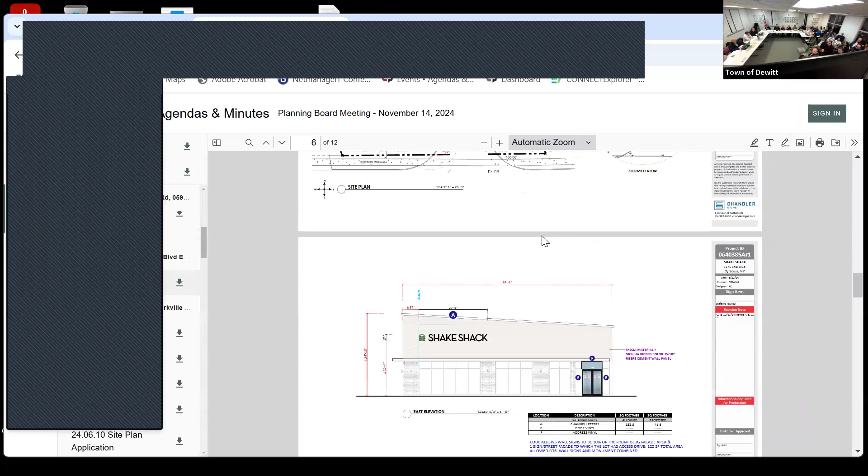The additional proposed signage does not increase pedestrian or vehicular safety, enhance the aesthetic value of the building, nor does it identify a patron entry. The sign facing Erie Boulevard already provides significant visibility of this use to the cars traveling publicly down Bridge Street to Erie Boulevard. The additional signage requested does not meet the purposes of signage as set forth in code section 192-106A, 1 and 2 of the town code. Accordingly, this board recommends that the ZBA deny the variance request for the additional building sign facing the project.

Excuse me, Nate, yes, I think that it's the sign facing Bridge Street that is providing the visibility to people traveling down Bridge Street to Erie. So I believe that would be a correction to that resolution. Accepted. Does that make sense to everyone? Yeah.

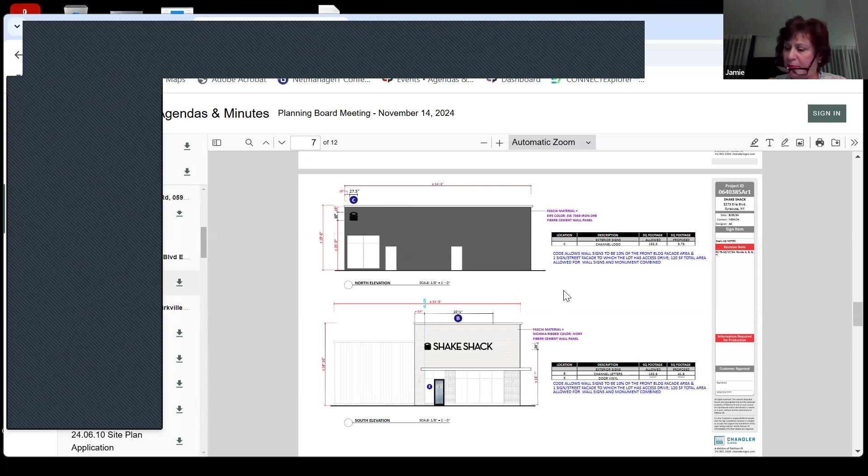So we have the one facing Bridge and the one each. Yeah, the one that we're talking about. The one pertaining. Yes. The hamburger, which I call it north, but it's not. Which is in the upper left of the building elevation. Relative to the building elevation, it would be north. That one right there. Yeah, it's that little hamburger logo in the upper corner. Yep.

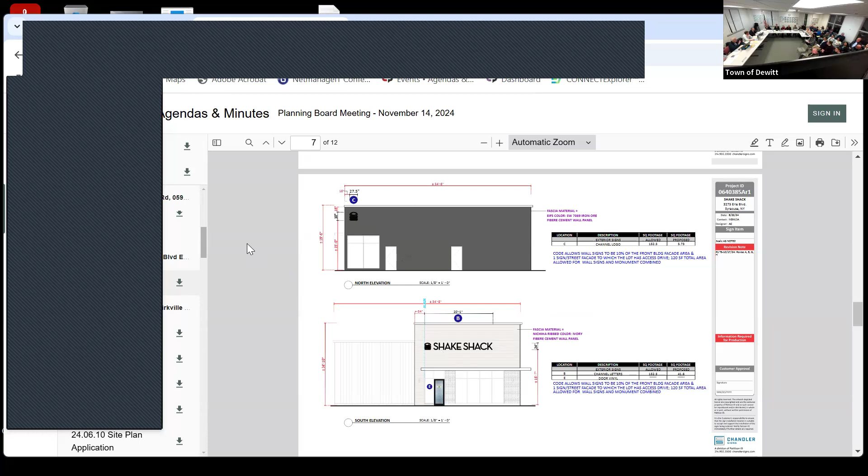Do I have a motion? Dave, second, Kevin, all in favor? Great. Unanimous, thank you. Next up, Restoration Pro. We have applicants here for Restoration Pro.

This one, Kirkville Road, right? Yes, I'm representing the owner. Okay. Why don't you just state your name for the record? Želimir Miranović. I signed the paper, my name. I should sign his name too. That's fine for right now, if you're here on behalf of the applicant.

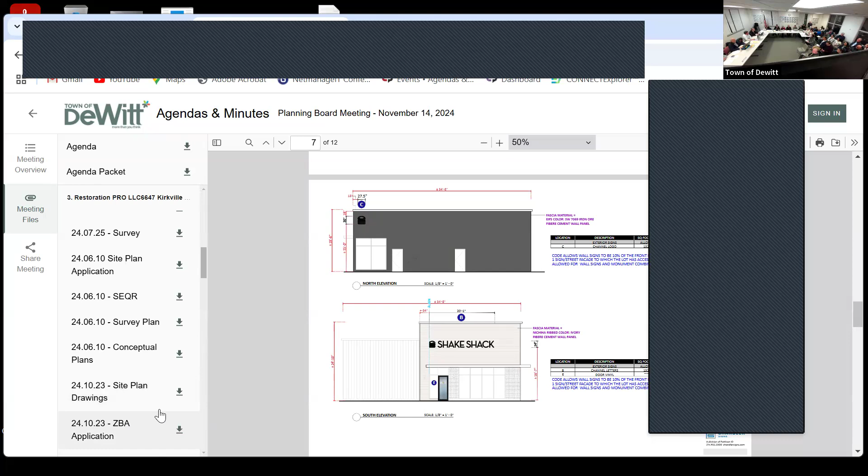Yes. Okay. So what we have in front of us here for Restoration Pro, this is a modification to the site plan. They're looking to build an addition on the back of the building. We've worked with this applicant over a couple of sessions to reduce the number of variance requests that they're looking for from the ZBA. I think we've gotten it to a point where we only have the 1 variance request, which we'll make a motion on this evening. Everyone's familiar with this site?

Okay. I'm going to make a motion for recommendation to the zoning board of appeals to allow for a rear yard setback of 29 feet for the construction of a small addition to the existing garage on the site. The required setback per code is 40 feet, which requires an 11-foot variance. The applicant has worked with the planning board to minimize variances that might be required for this site and to present a reasonable plan for this use in a high-tech zoning district. The building addition will be in conformity with the other site plan regulations and requirements and will not detract from the aesthetics of the site.

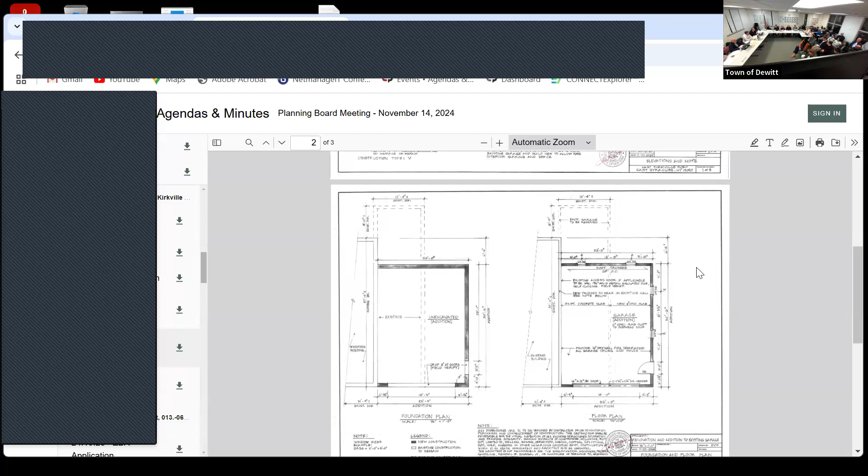The applicant shall be required to return to the planning board for final site plan approval, should this variance be granted. I think the variance is 10.6 feet. 10.6. Do you have the site plan? The current site plan, proposed site plan? This is the available one. Yes. The final was 29.4. Yeah, so 10.6 is the variance. So we'll modify that to be 10.6.

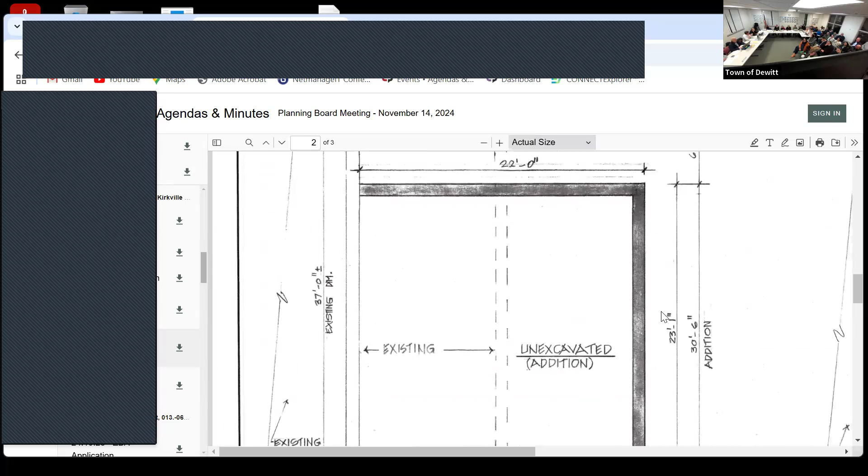Circulation on the site was also, yeah, so there's the space for them two-way. It is tight on the parking spots there, but that's an existing condition. They're allowed, they can get it. Yeah. What is the actual variance then that's requested? 10.6 feet. 10.6, okay, rather than the 11. Thank you.

Any other questions? No. A motion to approve? Leif? Kathy, all in favor? Nate, did you want to talk about building materials and all of that in this, or save that until we come back? We'll save that for when they come back.

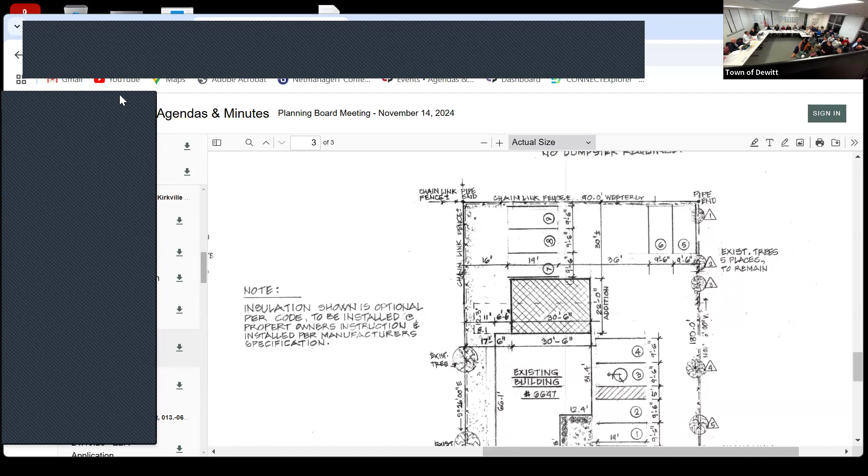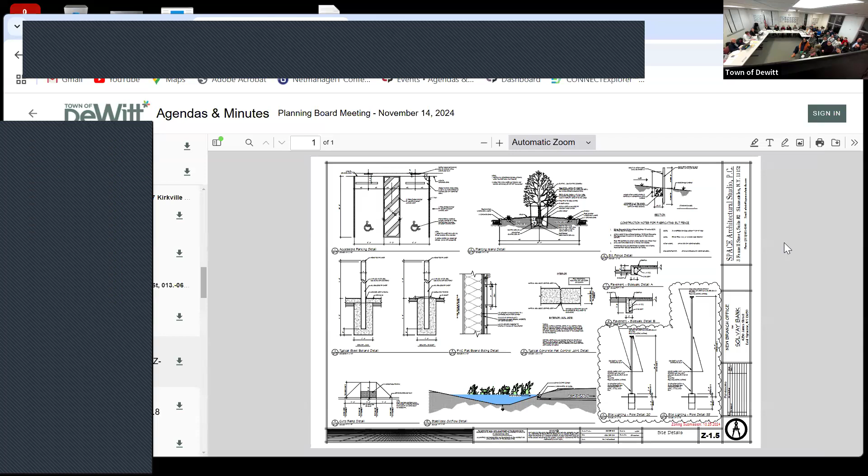All right, last up, we have, well, not last up, last of the recommendations, is for Solvay Bank. Yeah. Yes. Bill Murphy from Space Architectural Studio representing Solvay Bank. So here we're looking for a signage recommendation to ZBA. This is another one that we worked with the applicant in terms of the signage. I'm going to offer a motion for recommendation to the zoning board of appeals as follows.

This project presents a site plan improvement, which is a freestanding bank on a site where a grocery store also exists, making this a plaza multi-tenant site. The project presents two signs which are permitted of right in the code. One sign on the building facade that faces toward James Street and one building mounted sign that faces toward West Manlius Street. The applicant seeks a third building mounted sign which will face the parking lot in the front, air quotes, which is also the facade of the primary pedestrian customer entrance, the southwest side of the building.

The applicant has worked with this board to minimize the requested signage, including foregoing potential monument signage and additional requested signage on an additional facade facing parking. This signage is reasonable for the site and enhances reasonable traffic patterns around the site and allows for simple identity of the use. Accordingly, this board recommends that the ZBA grant the variance for the additional sign as presented with the understanding that the applicant must return to the planning board for compliance with a multi-tenant sign package as required by code.

Got it. Understand multi-tenant sign package. So we have to come back with a full multi-tenant sign package for the entire plaza, but that would be after we make it through the ZBA. Correct. Yep. Okay. Right, and there'll be a final approval, this is just the recommendation, then we'll look at all the rest of the details as well.

Yep, understood. The applicant further requests that the stacking requirement for the ATM lane only be reduced from 5 spaces to 4 spaces. This applicant has worked with the board on this very tight site to present a project that will minimize the need for variances and fit within other code requirements relative to drive-throughs, including the prohibition of same in the front yard. Accordingly, the slight reduction in stacking will make this site work appropriately for the ATM use.

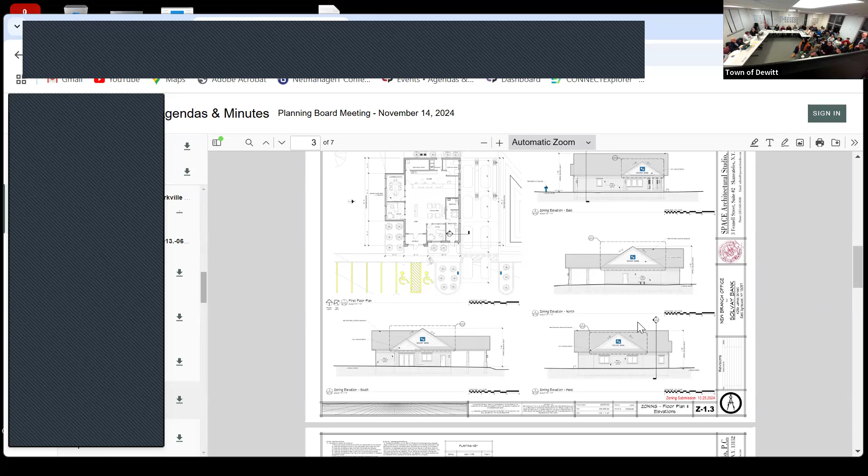The applicant has further shown that the stacking as presented with only 4 spaces will work for its use without major traffic inconvenience. This board therefore recommends that the ZBA grant the requested variance to allow for 4-car stacking in the ATM lane instead of 5, with the understanding that the applicant will return to the planning board for final site plan approval.

All right, so we have those 2 variances. Are there any questions? Has there been a finding on the official front yard? With respect to 2 front yards, is that still an issue on this? I don't believe so. No, no longer an issue. Right. That's a good solution. Yep.

Discussion. Motion to approve the recommendation. Kevin, Danny, all in favor? Great. Thank you very much.

Thank you. All right, so we are gonna shift now to the public hearing. The way that we're gonna do this now, everybody that came in will have hopefully signed in. If you'd like to speak, you need to sign in on that. We need name, address, phone number. We're gonna offer 3 minutes for those people that would like to speak. It is a strict 3 minutes, and if you look around, there are a lot of people here.

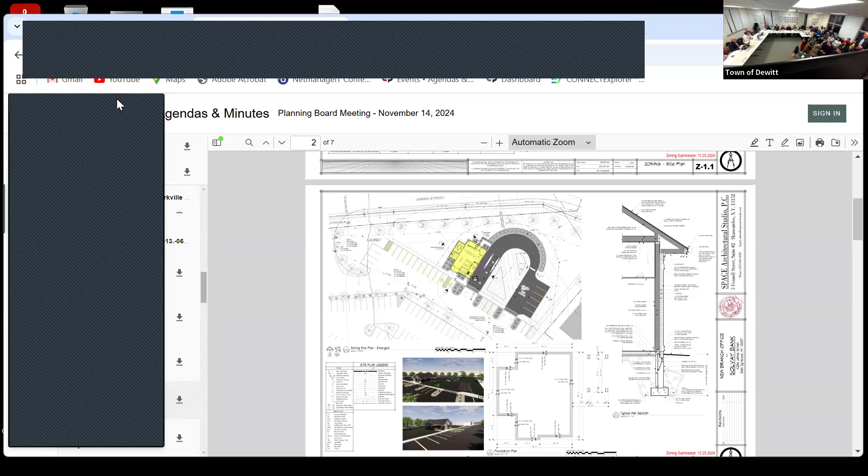After which we will ask the applicant to present their current layouts. And then this board will have a further discussion. I will say, once the public hearing is closed, public comment is done. I mean, we're not gonna open this up to people talking over the applicants, and we're gonna let them have their time to speak. And then this board will talk afterwards. So with that, we will.

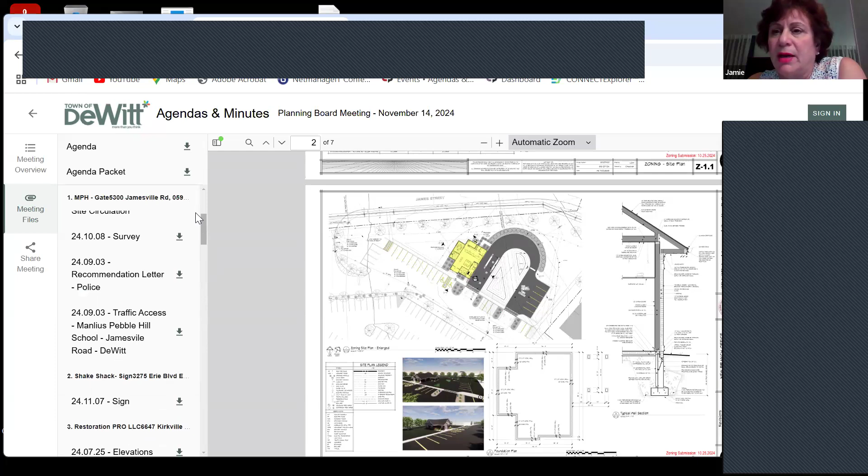Excuse me, Nate, I do want to state that I'm recusing myself from this matter, that Matt Natoli, the town attorney, will act as attorney for this matter. And I will be muting myself and turning off my camera. Thank you.

May it please the board, my name is Karen Doctor. I live at 109 Stonecrest Drive, DeWitt. My family and I have lived here for 31 and a half years. I am here solely in my capacity as a resident of the neighborhood. The issue before this board is whether MPH should be permitted to modify the existing site plan from 2007 to allow for vehicular site circulation through the gate at Pool Road during school student dismissal times.

On September 27th, 2007, this board granted the application of MPH for controlled site approval of the MPH Andrews practice fields with certain conditions. Significantly, in order for this project to have been compatible with and sensitive to its residential neighbors, MPH was to ensure that the gate at the existing lower level field on Pool Road be closed and a man gate installed for the students' walking access to Andrews Road.

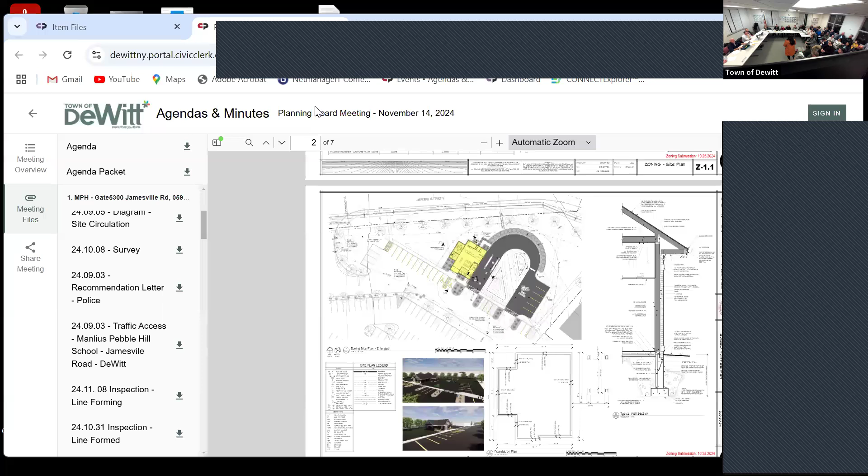throughout the MPH community. And I would just disagree with some of the opinions and the blanket statements that MPH parents are somehow distracted, driving too fast. Because that does not apply to every MPH parent who uses that alternative pickup route. And it's frustrating to hear that all of us are clumped somehow into this pool of people who are somehow misusing our speed down through the neighborhood, and that we lack the respect for the residents who are there, which is not true. Thank you.

Michael Green? Hi, Mike Green at 6891 Whitfield. I am a father of 3 lower school students at MPH, resident here and also a combat veteran. I think all of those things are important to say, but it's really down to our opinions. I don't know if there's a way of advocating for more of a metric-based decision and assessment that actually can ID some of these issues that are being talked about and described dramatically or not. Previous places I've lived have been able to do that, so I don't know if that's an option or not. But I would advocate for something that's a little more metric-based so we can understand the facts of what's going on as opposed to hearing more things.

Renee Vinyl? Just following what Mike Green had said, I'm a parent at MPH who's done both ways of traffic. And I feel like it's a little bit mischaracterized from what I've seen going through the neighborhood. I actually remark when I drive through how quiet and calm it seems. I never see any neighbors. I hardly ever see other cars even going up through MPH, maybe one other car at a time, and it seems relatively fast and seamless compared to the way that it was. So if someone could maybe observe both of the ways, and it's not so opinion based, I would agree with that too.

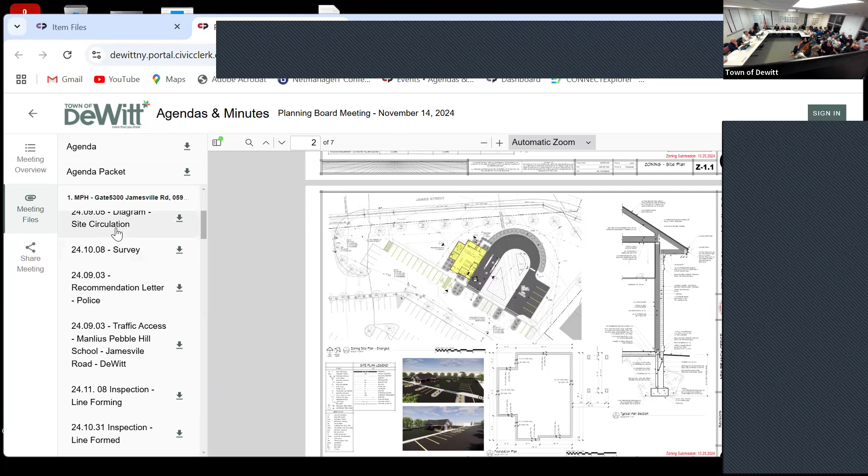Great, thank you. At this time, I'd like to offer MPH the opportunity to present. They have got new options to show us here, for the public. Yes, indeed. So thank you very much. I appreciate it. Are we under the time constraint or not? No, we're gonna have about 15 minutes to look at your updated application. You've got it from here.

Thank you, appreciate it. First I want to say thank you so much for everybody who's come tonight, including our neighbors in the neighborhood. I'm really, really grateful for a chance to meet you for the first time because I moved, right? This is my second year here at MPH. I moved to Syracuse a little over a year ago.

We really care about being a good neighbor for the neighborhood. And so I have to confess, I'm a little sad that this is the first time I'm having a chance to meet you. I would have loved to think that if there had been any kind of an issue or complaint that you would have felt comfortable taking it to us directly. And I just want to say here in public, on the record, to all of you, regardless of how this hearing turns out, either way, I would like to have some kind of an established mechanism for us to stay in contact with each other because it matters to us.

I don't have anybody's email addresses. I contemplated going door to door knocking at some point, but that didn't feel right, especially with an election season on and all that kind of stuff. So I just want to say that that is a genuine desire on my part as the head of school. So let me just give context here about what it is that we're thinking about.

The presenting problem emerged last year when I took this role as the new head of school at MPH, having no context of all of the history that came before it. My chief financial officer, Dr. Matt Carr, also started new with me. Neither one of us had any of that kind of history or context. There had been quite a bit of turnover in the administrative leadership at the school over the last decade. One of the first things that we learned was that we had a problem with the pickup procedures at the end of the day because there were two significant issues.

We did, at the board's request, put together additional diagrams that show other possible options, including the elimination of one of our athletic fields, which not only supports athletics, but also our club and organizational activities, commencement activities. They are listed in the top right-hand side. Our lower school classes for recess included, and community events as well. So this would seriously impact the school's ability to support its students in the pre-K through 12 environment and its community, while coming at a significant cost as well, both with drainage, paving, et cetera.

The other option that was asked for us to consider would be to widen the road closest to the access road that goes next to the gym and closest to our playground for young children. By doing so, we have the same concerns with cost and moving lighting, drainage. In addition, that road would abut directly against the playground where our students ages 5 through 12 play both during and after school, creating a significant safety hazard with two-way traffic at that point.

In addition, we have the issue with the buses coming in, and because the number of buses exceed the length that we have for pickup, because of the number of school districts we support, at a certain point, we would no longer be able to process through in two-way directional traffic and back up significantly onto Jamesville Road in both cases.

So in both cases, we do not feel as though that is a suitable alternative to what we have proposed. And I would add, we're talking costs in the range of six figures and up, right? We don't have those resources to spend. And I don't have the luxury of seriously compromising our program by removing fields, by removing playgrounds for children, right? So, to my understanding, we did look at those, but they're simply non-starters for us.

So to my mind, the only viable alternative, if we're not allowed to go ahead with the site plan, is that we're going to have to go back to rules of the road on Jamesville Road. And again, we're not allowed to be crossing guards. My understanding is that the town of DeWitt can and should pay for crossing guards to do that. That's, I guess, on the town, but that's not something that I have a choice to be able to do. Is that true?

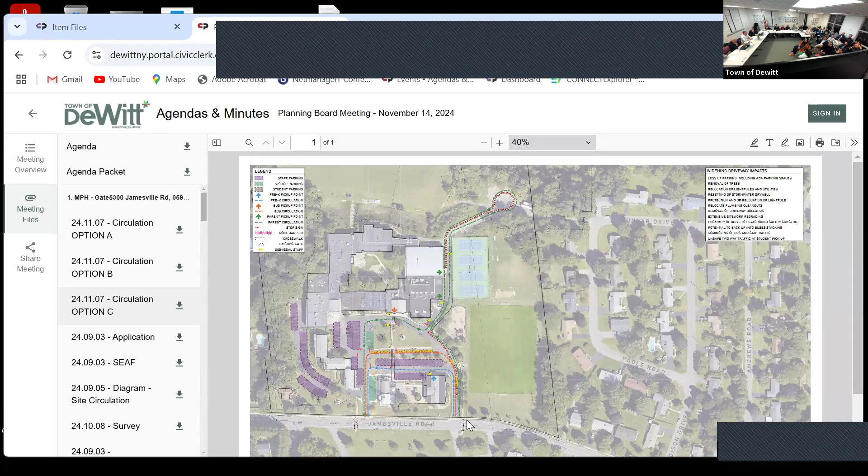It's not true. It's not true? Holy Cross, another private school, we have a constable, and that constable operates in that school as school resource officer. Okay. We have to do that with a private school because we can't pay for things for private. I guess I'm not familiar with the office of a constable, again, I'm new here, moving from out of state, so I apologize. Is there training that they go through, or how does that work?

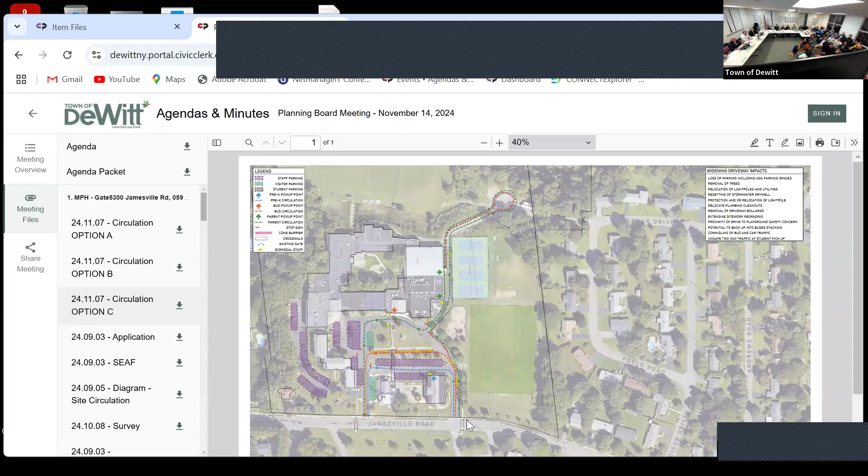They're a peace officer, but it's a way that the town can have police monitoring private schools. We're able to do that because the private school pays us upfront, and then we pay with the school's resources to the constable, so the town is not fronting any money or credit or anything. And I don't know if you've had conversations with the police department asking about crossing guards. I don't think anyone did, yeah. No one's saying that you have to have your employees out there shepherding people across the street. I think the town would welcome a discussion to get some more help with the actual police crossing the road.

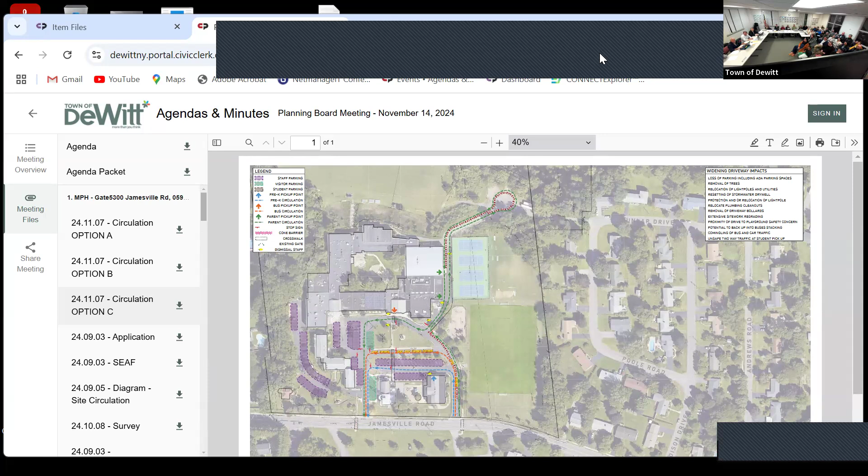Could we look at the videos so we can take a look at what's actually going on site versus opinions and a traffic study to document? I think for the visual people in the world like me, it might be helpful. If you wouldn't mind clicking on that link, that'd be great. So we flew a drone up on the site just to get our eyes on what was going on. The drone battery only lasts 10-15 minutes, high quality. So we're giving you a snippet from 3 to 3:10. And this is at 16 times the speed, so don't be alarmed at how quickly the people are walking and the cars are driving.

Could you expand that? We're not getting the times on there. Yeah, make it full screen, please. I got times in the bottom that are kind of ticking by. Mine's starting over for me, I'm sorry. We got times, so I want to go off the times there so we understand what's going on here. All right, if you do the hover, that should go away. There we go. Great, Monday, 11/4, 3 o'clock, don't move the mouse. It's not me, I'm not touching it.

You'll note our cars are stacked, they're not backing up, they're coming through the gate. Provided the gate is open at the time, you'll see that other cars are not only in the site, but they're stacked on the asphalt, which represents a significant distance from the gate. So backing up onto the neighborhood road would not be an issue based on this volume, for one thing. Next, there was some conversation about the cars coming in and then going back through. That's never the case. The cars are always going one way through the neighborhood, going through here and pulling out.

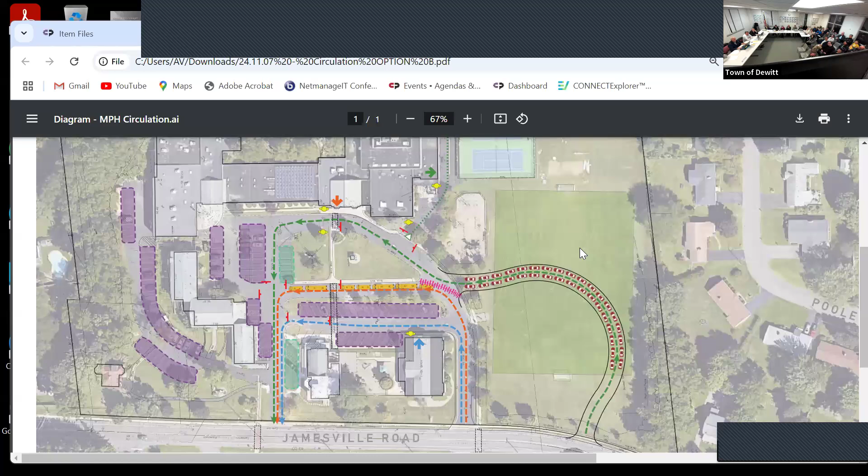I think what we need to look at here is certainly the application in front of us, but the fact that you have a significant amount of land, you have options to contain your traffic on site. Option C, even though you might lose a little by widening that area to create the loop, there are options. What's option C? Widening the one way out. We ran a cost estimate for that, right? Yeah, $100,000. I understand there's a cost implication, but forcing the cost implication from your property out into the neighborhood is not a reason for this approval.

I would say two things, though. One, bringing more cars on here is also when students would be on campus moving from field to field, and we talked about lower school students having to walk across those things. And two, there's a difference between cost in dollars, which I don't have, and cost in time, which is what people would be spending on Jamesville Road as the alternative. The option we're looking at here appears to contain all of the cars. Right, at a cost of dollars. Understood, which I don't have. Okay, I hear that.

I'm not challenging any of that, but the fact that you've got an issue that you can deal with on site somehow and be creative, and I know Christian can be very creative with figuring this out. Only with dollars though, right? Potentially. So I don't know. I could just use it.

Use the existing site plan and the existing rules of the road. And that's what we would have to do, right? Yeah, you can do that. That's what you should have been doing. And again, at the cost of safety to the neighborhood. That's your opinion. I think that we start to put something like money versus safety.

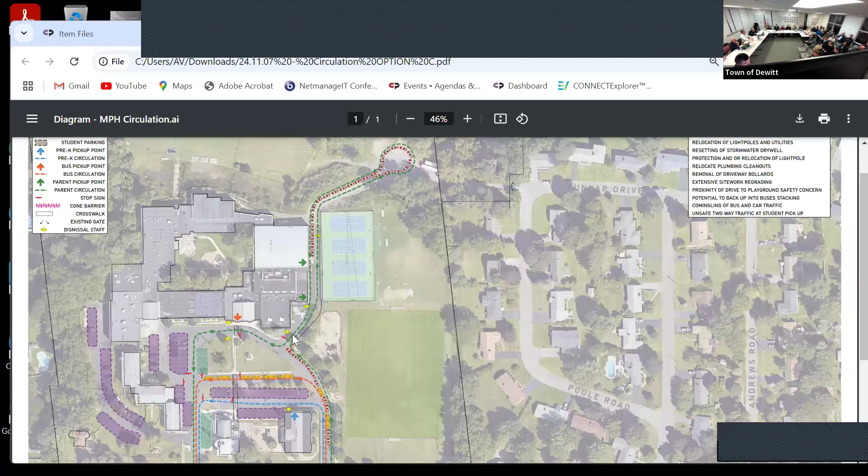Okay, next up, we have hallway comments. Give me a second, I'll let everybody head out. Thank you, appreciate it.

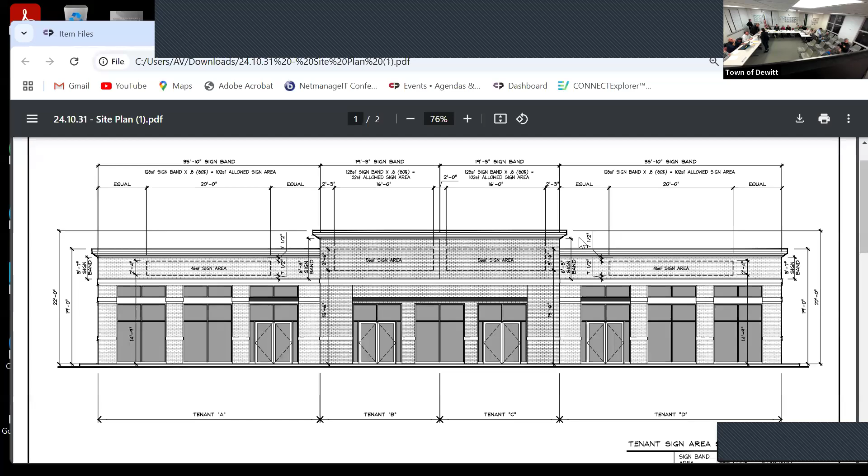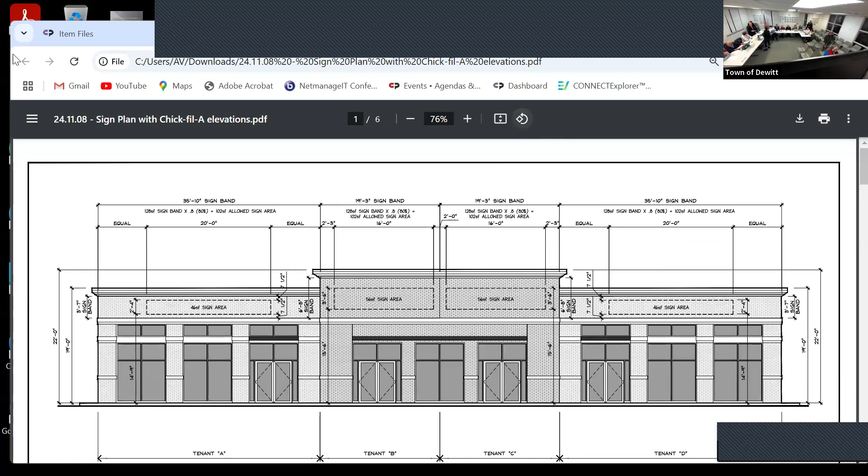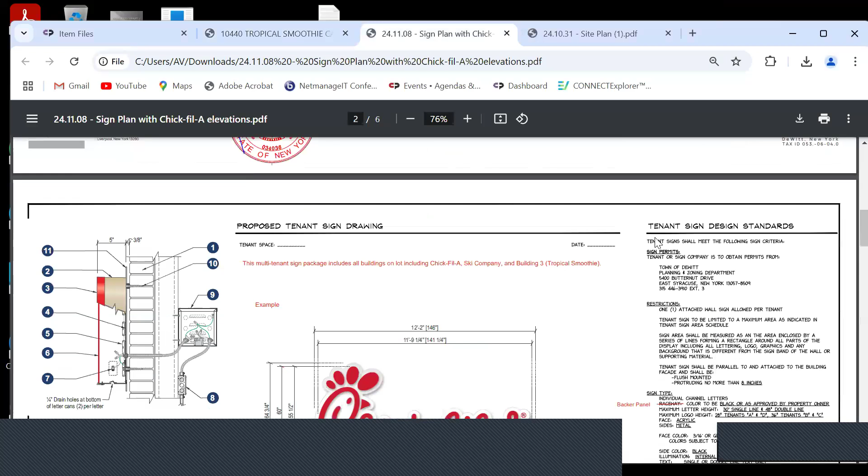Well, multi-tenant. I believe Chick-fil-A was already approved, and you guys wanted this building to have the same pattern. So basically we took the Chick-fil-A template and did exactly what they did to make it uniform across the whole lot, because that's how the code's written. We'd submitted one for Tropical Smoothie, but we got feedback saying that it needs a backer panel like the one Chick-fil-A already submitted. Yeah, I think that's the consistency that we want to see through the plaza.

Correct. So the other thing with this one, and maybe it's been corrected, the 2'4" sign area which was approved with this building, the Tropical Smoothie Cafe is bigger. It has to stay within that 2'4" height. Okay, so when you do your scaling and size, it's gotta stay within that 2'4" height. I don't think you're gonna reach the 20 feet, but part of the height is outside of it right now. You realize that, right? Yeah, this one was by the corporate Tropical Smoothie sign guy, and I don't think he's on this call right now.

But I mean, that's feedback we're gonna have to give them. Is the 2'4", is that line an actual building line? No, it's just a reference line. It's a reference line. Good, 'cause I don't. No, it's not. Yes, no, there are no actual lines.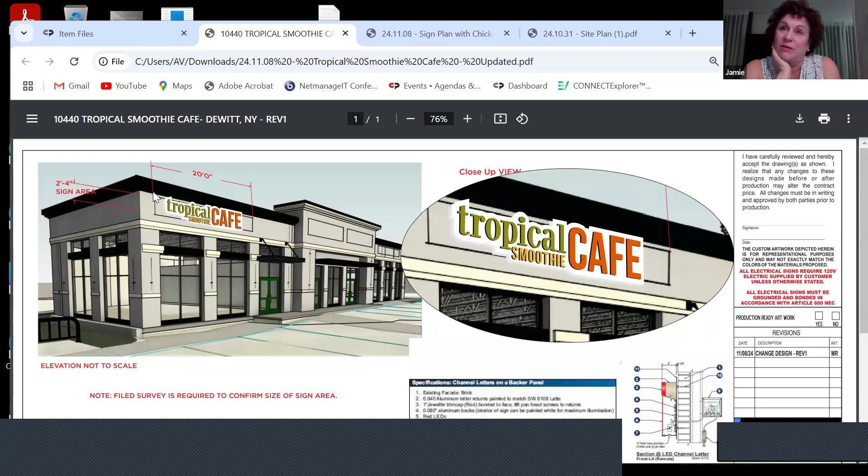Sorry, we need to fix that wording at some point. It's there, but this is what we have to work with. Because you could put nothing on your building in a clear glass window wall, you can see right through the middle. So why would you approve a window? I believe that was actually brought up when that was approved, like, what are you gonna do with this window? And if I remember correctly, I think there's actually a wall directly behind the window covering.

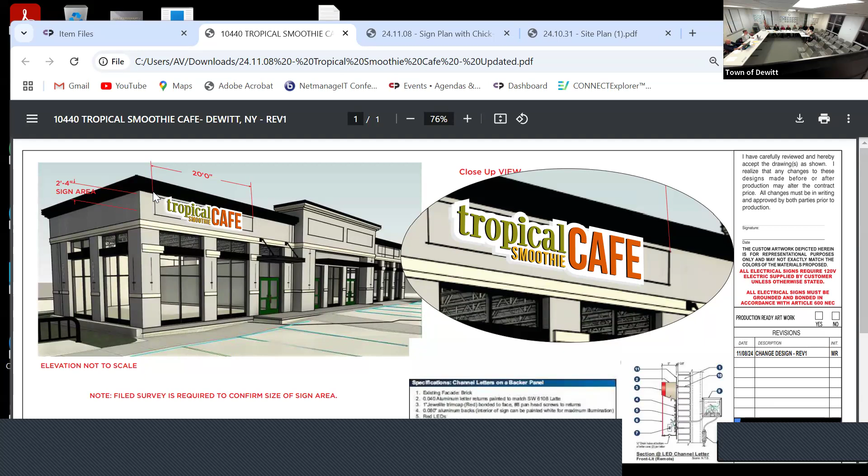Yes. So, anyway, okay, but I think we're here right now. That's okay. We're headed in the right direction here. Get this taken care of, then we can get everything put into a package and get a multi-tenant sign package pulled together. We'll have our standards set up, and then that's what we'll adhere to going forward.

Sorry, quick question: is the goal 40 foot per store, or does it really need to be 2 by 20? Say that again. Signage. I assume it's 40. Well, there's essentially 4 tenant spots there, theoretically; they have 4 doors. Yes. So if you look at the multi-tenant, is the 2 by 20 the criteria, or are we going to limit it?

It's 2 by 20, because when we approved the building, we approved the signage area, and that's 2 by 20. That's on there, and those are the identified squares. And in the center, it's less because there's no additional space for it. They just divided it by 2, 3'6" by 16, to get the square footage. So they can make a sign box that's that exact size, or they can put their logos in it, the logo signage, whatever they wanna do.

The color criteria has already been set by Chick-fil-A, but they're matching, so standard in there. Right, we don't think they have to meet the Chick-fil-A colors. No, colors just have to be approved by the owner. We're not doing any neon flashing lights. I'm putting that out. Okay, you got it?

Alright, for Tropical Smoothie, they're trying to open up the first week in December, when our build-out's gonna be done. What do they need to do with their sign now? Well, you've got to get a whole multi-tenant sign package into the town office, which includes all the signage, and then on top of that, we've got to get the other one addressed, the ski company.

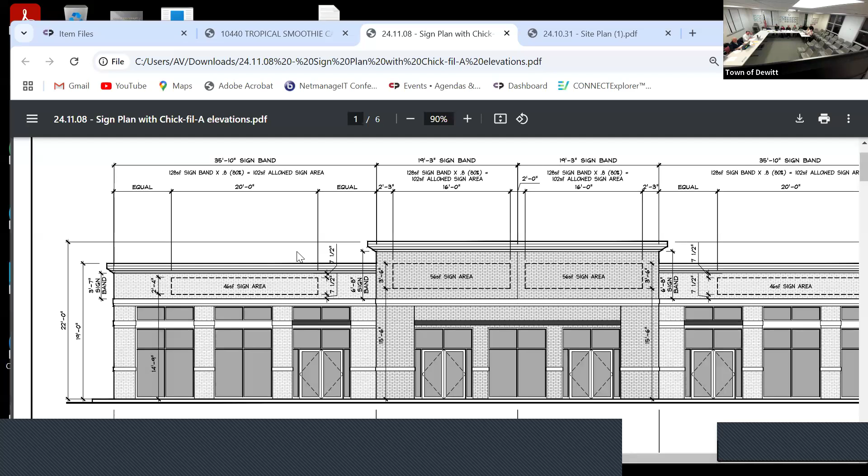So we're gonna have to resubmit this multi-tenant sign package again, even though obviously the window is holding it up. Well, the package that you have in right now shows the sign too big anyway. Correct, I can have them correct that. Right, so you correct that, with the Chick-fil-A signage. Does that come in front of the board or can it be permitted? That has to be the board.

The board, but if you can get the materials in, we have 2 meetings in December. This is our only meeting in November because of the holiday. So if you get the materials in, I don't foresee us having an issue with this at all. Just make it happen, we'll push it through, but you've also gotta get the ski company taken care of. I'll figure it out.

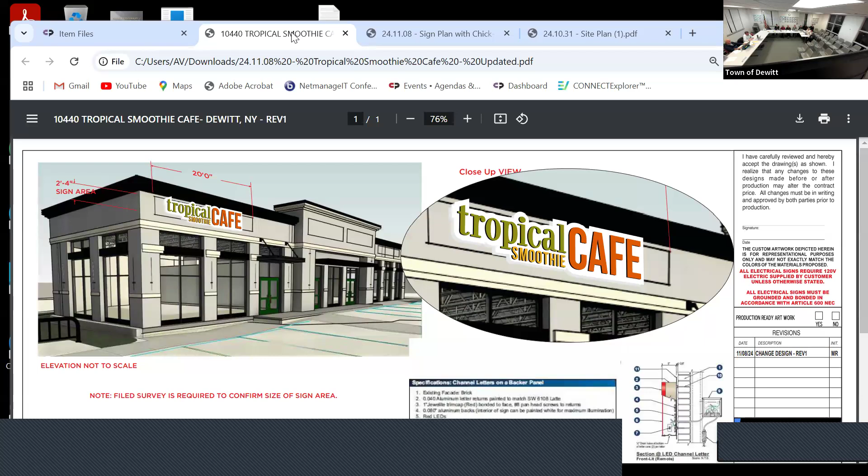Okay, right? And then I'd like to get a letter from you guys saying we're gonna take action, because it gives me a little assurance. Yeah, and that's fair. And so Alana's office can get you that, okay? Thank you.

What other entertainment you got today? I'll talk about some EV chargers. Why don't you give $1 million to the school? Okay. All set on that one, let's move on to the last couple of items. Yeah, keep picking up some work.

Do we have the applicant for the EV chargers? There's nobody else here in the room. Hi, yes, I'm here, I'm online. And you're representing all 3 of them, correct? Correct. Courtyard, Residence and Embassy. So let's talk about those as a singular. They're all different layouts. So, do you want to present? If I can, that'd be great. Make sure multiple people can share; I just sent a request for that.

And Bridget, what's your last name? O'Connor. Thank you. Just let me know if you can see my screen. We got it. Okay, good. I'm just gonna go through each one to explain the scope of work, since they are different for each one. The first project is at the Courtyard by Marriott, located at 6415. I'll show you a few different versions of the project because sometimes it's hard to just look at construction drawings.

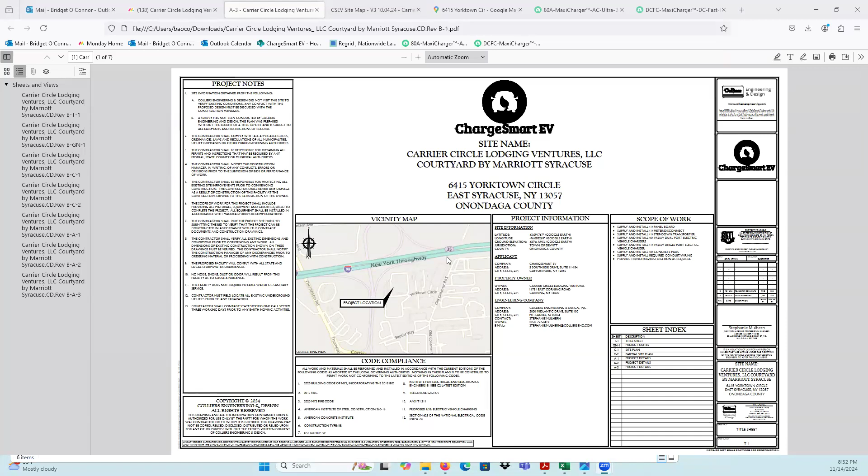Actually, we're lucky for these 3 projects on Google Earth, we can get right on the ground and look at them in real scope. So here's an aerial shot of this project. This specific project is a level 2 only project. So those are just level 2 charging stations, which are smaller, slower stations, I should say.

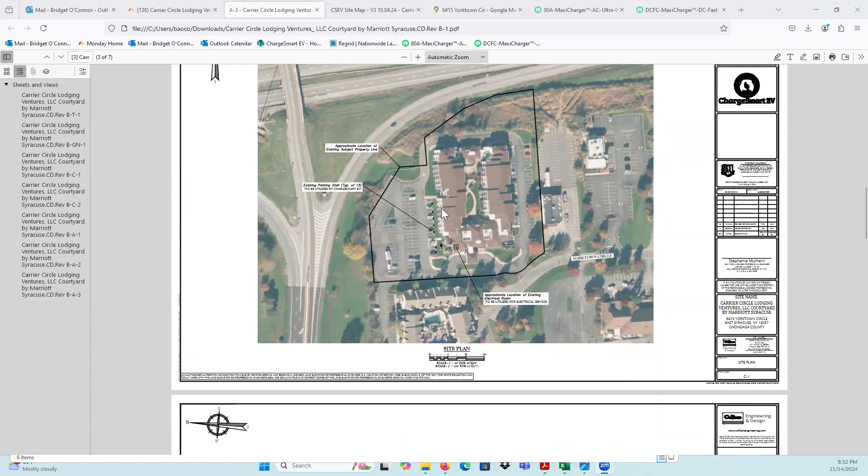A level 2 station, if you're not familiar with EV charging stations, takes between 4 and 6 hours for a charge, which is why these are great options for hotels because a person staying overnight at the hotel, if they were driving the EV, could plug their car in overnight and leave it there. So what we're proposing at this specific location is 6 level 2s that have dual ports on them.

So that would be 2, I'll show you a picture of the station in a second, but it's 2 ports per station and then also an additional single port, which is located in this location here. So we have 1, 2, 3, 4, 5, 6 dual ports, and then the single port in front of the ADA spot here. The power for these particular stations would be coming off of the main distribution panel, which is located inside the building.

I'm just going to move to another view of this so it's a little bit easier to see. So again, we have 6 stations along the side of the building here, each providing charging to 2 cars. A single port here, we would have a panel and our meter socket would be going outside of the utility room, which is located in this area of the building. Again, I'm going to show you, just drive around here.

So here's that aerial shot. If I come and stand here, we can see the area that I'm talking about. So the utility room is in here. There is space available on the main distribution panel that we could pull power off of. We'd be putting our panel out here and then the stations along this side of the building. Unfortunately, I can't get any closer. I can zoom in, but this is as far as I can go. The camera didn't drive.

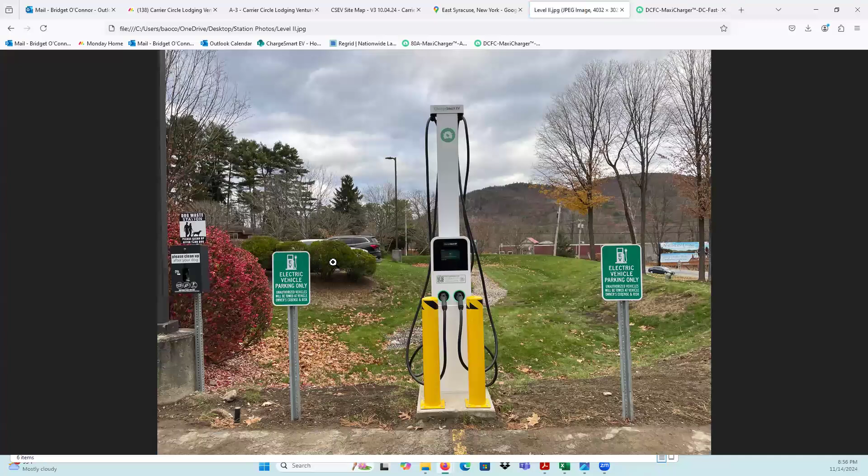Okay. One second, I hope you can see this. I just wanted to show a couple pictures if I could, so you could just get an idea what they look like installed. Much different. The yellow bollards. On a pad with the bollards. We have a few different designs that we do. If it's a sidewalk, let me show you a sidewalk here. This is when the stations are on the sidewalk, if there's enough clearance behind it.

Can you go back to the product cut for a second? Sorry, can you say that again? I cut out. Yeah, can you go back to the product cut sheet? Sure.

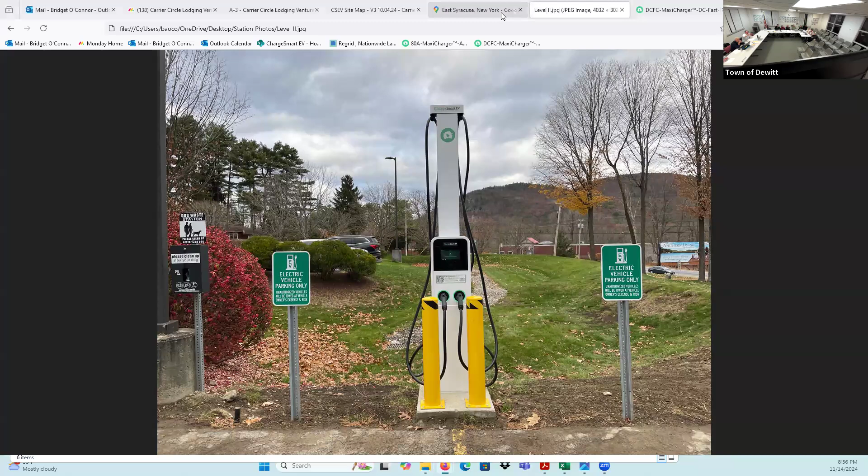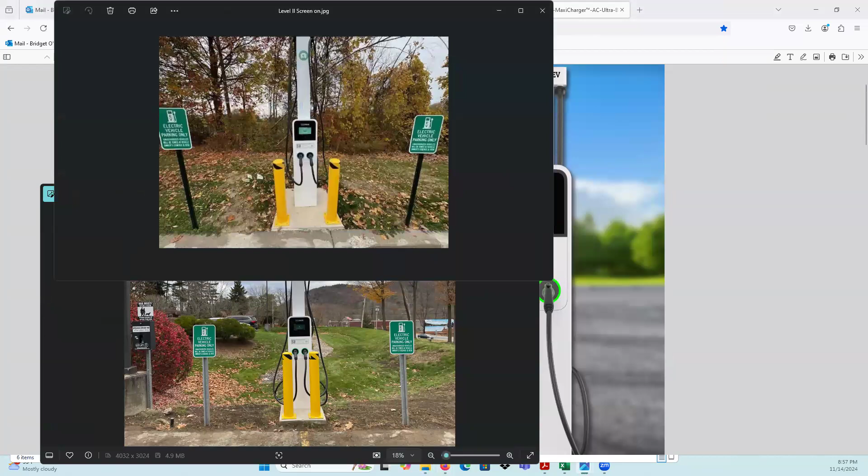Did I lose it? Nope, that's a DCFC. Here we go, here's the AC. So this is the level 2. So that center pole where you've got the little green charging car logo on there. Here it is, and it's a little misleading when you look at that versus the picture. Well, let me show you. Let me see if there's another one here.

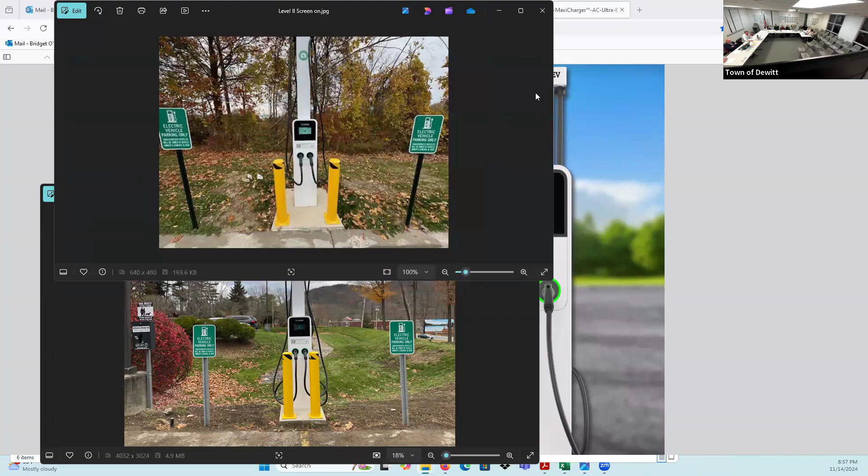So what's happening here is that the cables that they asked us to ship for these projects were longer. The stations are actually usually shorter, but because they wanted 25-foot cables, that's why this is put up so high. But we can make this lower; this is adjustable. But when you make it so much higher, I don't feel like you get the use of the length of the cable. It's not retractable, usually a little lanyard.

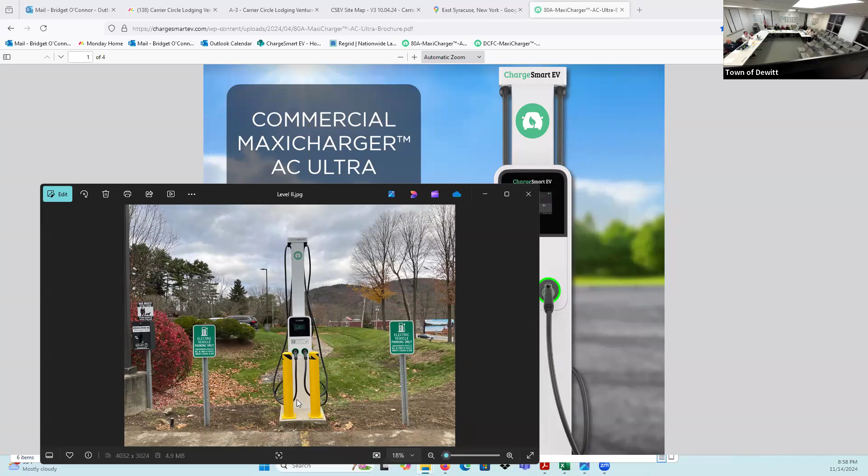Yeah, but why wouldn't they make it retract further? Yeah, right, I hear what you're saying. Why have it so high? I think it's because they don't have them retracting inside the unit because the unit itself is so small, so they have them this length so they're not draped all over the ground. So what are you asking to put here? What we'd like to do here is a level 2 station, like I just showed you. The length of the cable, the height.

We can put the shorter height in if that's the preference. Another thing that happened was our manufacturer had run out of the typical size we were using, which I think was a 15-foot cable. But obviously, if you have a preference. Yeah, our preference would be the shorter. Okay. Are they requesting the longer? The one that's shorter with the 15-foot cable is what we want. It should look like that. Shorter; 25-foot cables is not what we want. Right. Okay, sorry, keep going.

I should have pulled up ones of the standard size; those are just recent projects we had done. So I'll just go back to the layout here. Is there any issue with how we've laid out the stations? Well, the ADA spots, those are really challenging with the charging station. I'm not sure how you're accomplishing that. Even the display is hard; they're tall. Is there a different unit for the ADA spot?

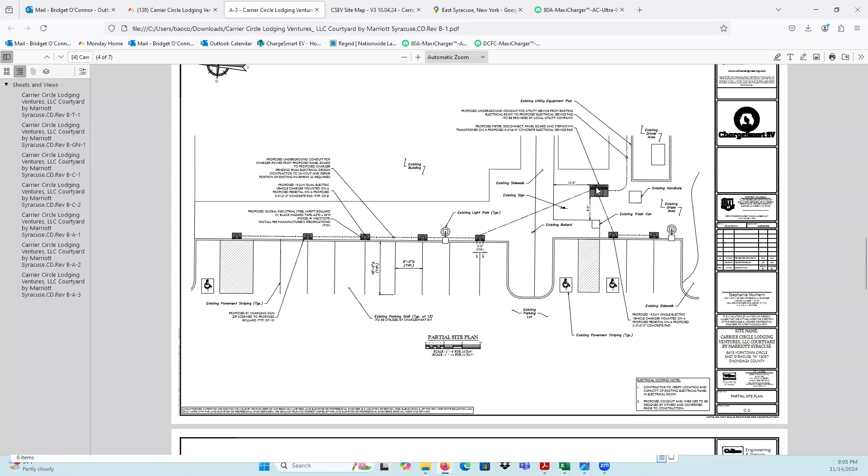It is right here. And do you have an image of that you can show us? Give me 1 second. It would be good to get an elevation. Bottom line is, yes, it's gonna wanna be screened, in terms of its height and what it looks like. I don't have a photo readily available. You supply that to Alana and she'll distribute that to us? Sure.

Sorry, I can actually show what it looks like. Let me share again. In here we have a call out, our backboard details, typically what this looks like. You have a concrete pad with a rack, and then mounted to the rack is a panel meter board. You're not sharing anymore. There we go. So this is in the plans on A2. This is what our racks look like, and then we just mount our panel to the rack itself. How tall is that ladder rack?

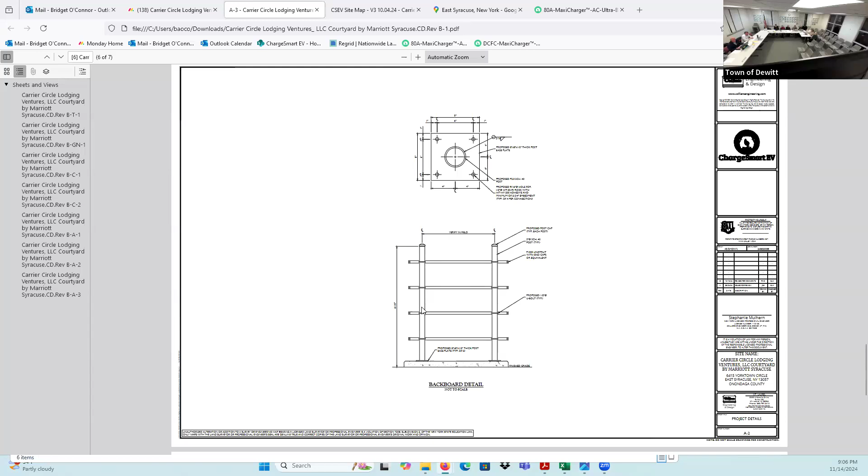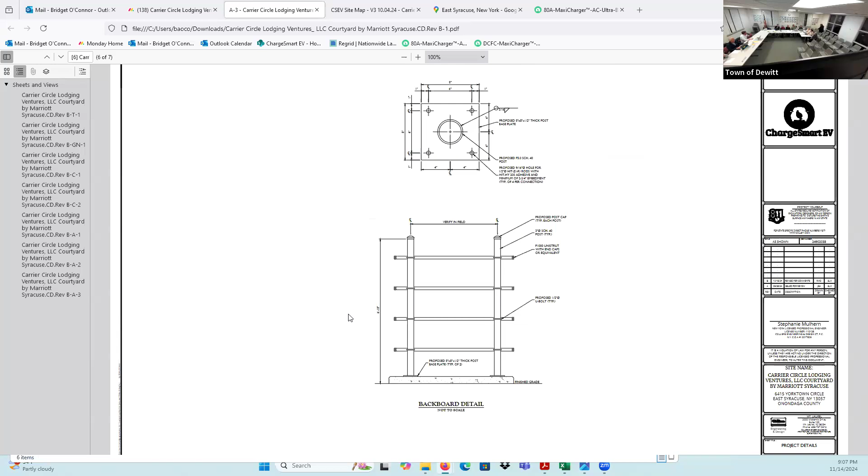6 feet, what does it say? 6'10", I think. Yeah. Can't read it. 6 feet 10 inches. That seems like overkill. Yeah, that is, I mean, we're gonna ask that you keep that to an absolute minimum, okay, and screen it. Okay. But the screening, I think the screening approach is actually pretty difficult here.

Because to have just a single shrub or a tree in front of each one of the power units, I actually don't think that achieves what we're looking for. I kind of feel like the screening needs to be something along the entire length. Or, landscaping wise, to incorporate for this to work, because I think it's actually worse if we just have power pack, tree, power pack, tree.

Is there a sidewalk? There is no sidewalk. It's not on the sidewalk. So along that entire run. Oh, there's no walking there, it's grass. Right. They don't walk to the parking lot, effectively. That's my comment. Did you hear that comment?

I didn't. When you're screening along the whole length, would it be starting from here and over, or you want this whole area screened? I mean, to the point that Doug made, instead of individually trying to screen each one, which doesn't achieve what we're looking to do, it is more of a consistent, balanced look to screen the entire length so that people looking out the windows in those spaces aren't looking diagonally and just seeing the side of the charger. More of a hedge. Yeah, exactly, more of a hedge. Okay.

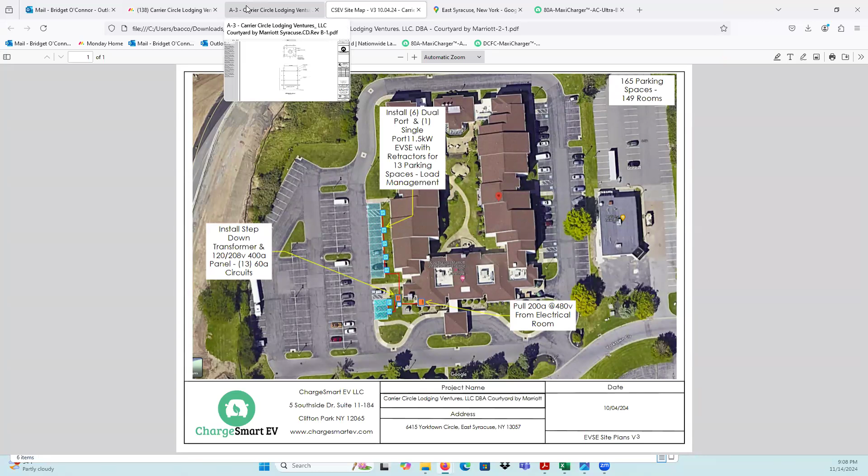So I'll get some examples of what that could look like, and I'll definitely make sure to put something formal together, and I can even have the plans updated so that they call that out, so you know what it looks like. So you're essentially saying something that would go from here to here, along here, which is where the rooms are, but not necessarily a hedge needed here because there's no rooms here, correct?

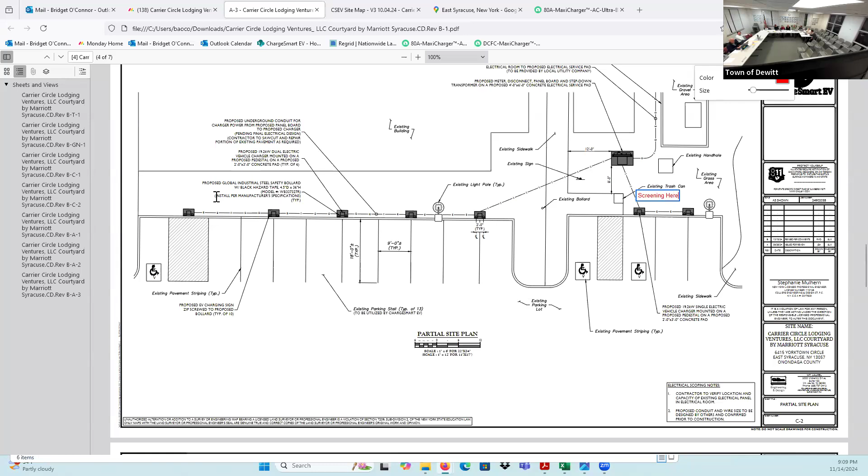I mean, I think you're gonna do screening around the other electrical equipment you're talking about, so I think you could tastefully incorporate some screening. Okay. Be more consistent. I think it should be a consistent solution. Yeah, exactly, consistency across the board, and then consistency across each of the properties that we're talking about. Sure. I am interested to see what you'll say about the next site, because it's a little bit different of a setup here.

Are you okay? Do you feel good with this one? Can we move next door? Yep. Yeah, okay, great. All right, we're gonna close these up. Don't say that, I'll remember that, okay.

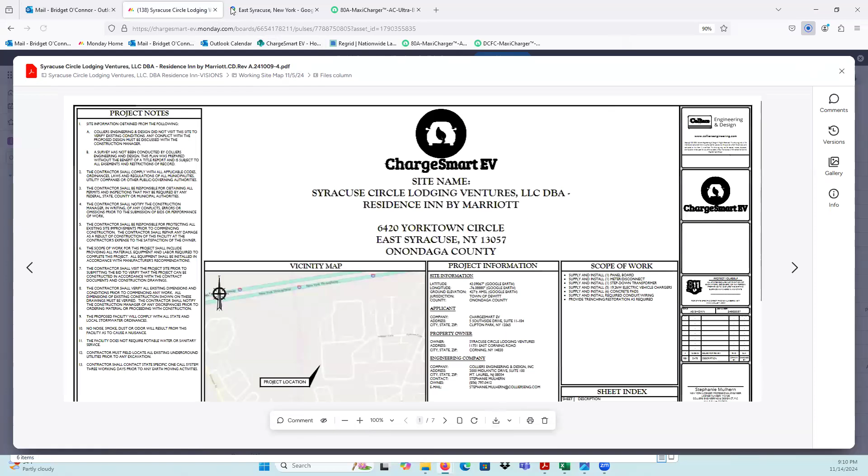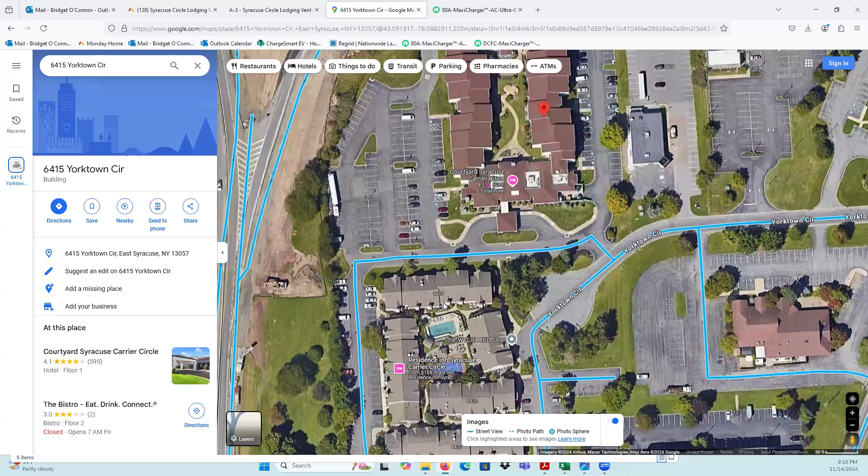So the second one we're looking at is the Syracuse Circle Lodging. This is literally right next door, so let me just pull these two maps up, give me a second. Okay, so this is next door, the Residence Inn. If you're in the location we were just at, this is where we were looking before. This project is taking place over here. We had originally looked at putting the project along this area because we are going off of the MDP, the main distribution panel, that's again located inside the building over here.

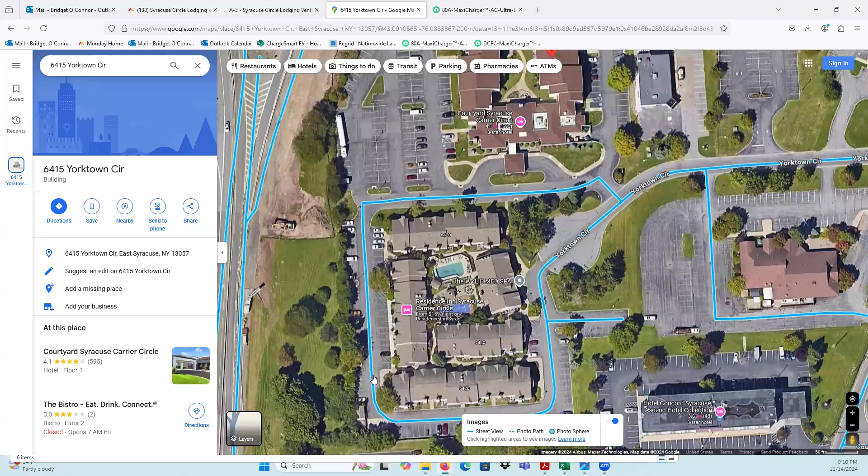But this was not going to give enough clearance for ADA. So we've moved them across the parking aisle. Again, the main distribution panel is through this, I think it's through this door. And we are looking at putting the charging stations along this area, and we'd be curb cutting here. There's not room to screen, but it obviously already has some screening with the fence.

That's up to the Thruway. Yeah, so I think with the fence and your Thruway as the neighbor to the rear, I don't think you're gonna need to do it at this location. Okay. And just so that we're all on the same page with this one, I also want to make the statement that the fence will remain intact, that the fence doesn't get cut to accommodate. Correct. We're gonna have to curb cut again over here, so that we'll be coming into the curb itself and we'll pour our pads here.

So a portion of the pad will be into the parking stall? Does it shorten the parking stall? Yeah, I mean, we put the stations in between the parking stalls, so it doesn't really have that big of an effect on the length of the stall itself. Yeah, but what about the bollards? Like, I back in, so if you were to back in and then you have to get stuff out of your trunk and you have a station in the back corner.

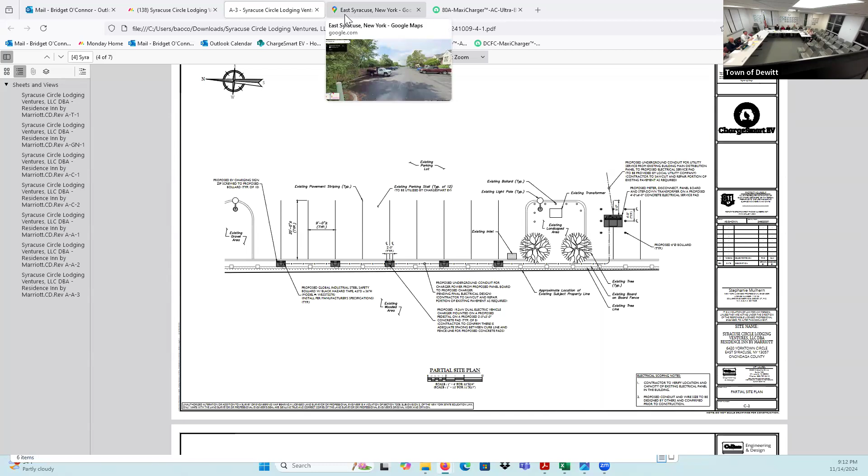Go back to the street view that you had there. Yeah, the bollards are minimally invasive because they're on the actual pad itself. That truck is taking up the whole spot. That doesn't look like a large spot. Those are ample two-footers on each side. Something else: you have to meet the parking code, which is 19 feet for a parking stall.

Okay, so as long as we can meet that. Are you saying from the station pad? Yeah. Because like I said, the pad would be cut into the curb minimally, and then the rest of the pad would be poking out into this area. Your aisle width also needs to be 24 feet. But your snowplow guy is gonna hate that. Yeah, so the bollard cannot be in the parking spot. The bollards need to be on the curb line.

Yeah, that's where I would think you want to put it. I just don't know how much room there is. Hard to tell, it's about 2 feet. I've pulled into plenty of charging stations where the snow just can't get out. They just pile it up against the station. You can't even back in. Right. So you don't want that either. You're right. Okay.

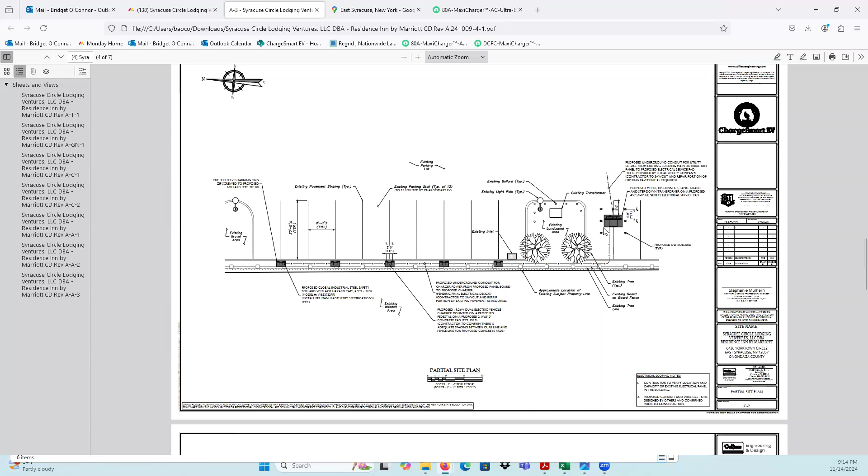And here we have 5, correct? Correct. 5 stations, 5 dual ports. And these are the level 2s as well. Any other questions on this one? Yeah, where's the wire rack gonna be located for this one? The gear for this is gonna have to be taken up in the parking space on the opposite side. So we're looking at taking up a parking space, most likely just 1, and then we would have that all bollarded off. The conduit would run behind. We wanted to put it in here, but there's just not enough room with the transformer that's already in there.

You're gonna lose the parking stalls. My suggestion is that you curb that and eliminate those 2 parking stalls. You also need to prove to us that you don't need those 2 parking stalls in terms of the parking count requirement. And if you're getting rid of a parking stall, you might wanna make a little space in between a couple of the spots so you actually have the space for the bollards. Then they can step out into the asphalt zone and get around. It's all about parking count here.

So you can get rid of one spot, use half of the spot for the new rack and use the other half to put some extra space where you wanna put the chargers down the row. You know what I mean? So then in front of the bollards, you could have a little passageway. I'm sorry, I wasn't following that. Could you say it one more time, another way?

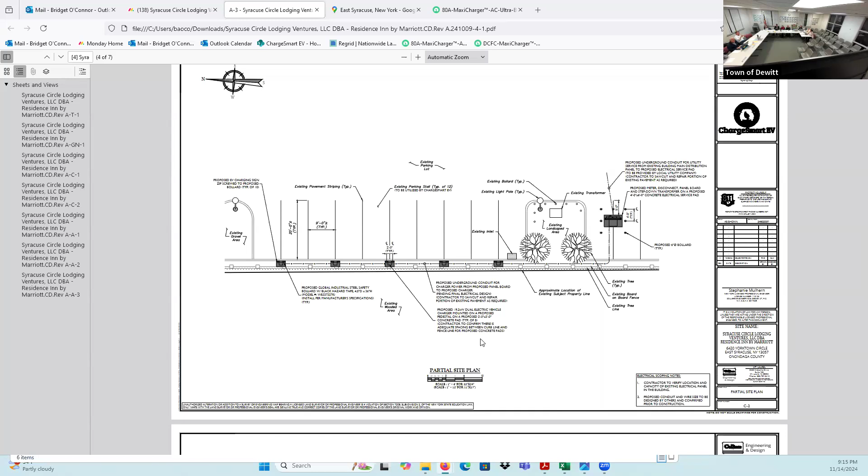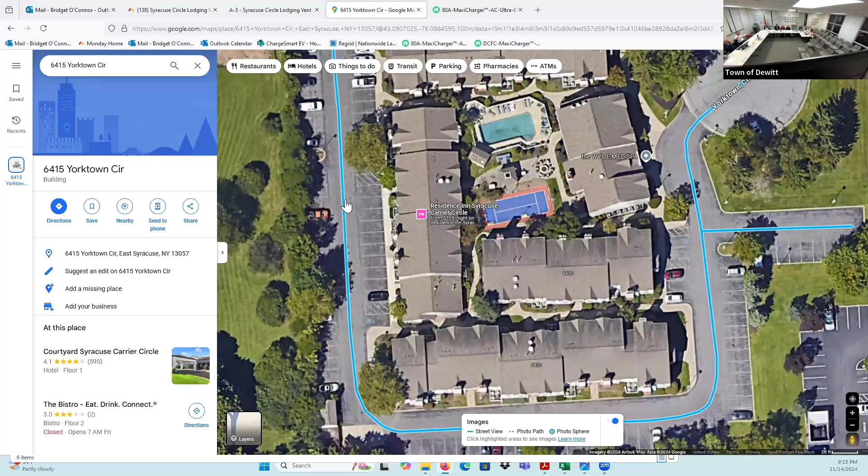So if I'm understanding, eliminate a stall on the other side where the chargers are and redistribute the width of the parking spot. So you have almost 9 feet, so you have 2 4-foot sections that you can put dual chargers in. Right. And then you plug your car into each of those sides, whether you're parking forward or back, because those don't look like ample spots. They look like smaller spots. But you could distribute the additional width of the parking space that you're taking away because of your rack.

And you can put it in between 2 spots. Right. And make it so it's a no parking striped out lane, and that way you could have the back there and you're not interfering with the depth of the parking spot and you're not interfering with the parking spot, period. Okay. And so essentially we would restripe this so it would be laid out a little bit better, and I hope you'd be okay with it.

We'd probably have to put a station over here then, because we just don't have enough. There's only 10 spots here and there's 2 spots per charger. So if we were gonna put our gear on this side of the median, or whatever this is called here, then we would lose a space for a charger. Yeah, so I think if we were to see how you were gonna lay it out and how it actually works, then we would have something to really look at that would work. Because right now, I think that it isn't a feasible solution that we have.

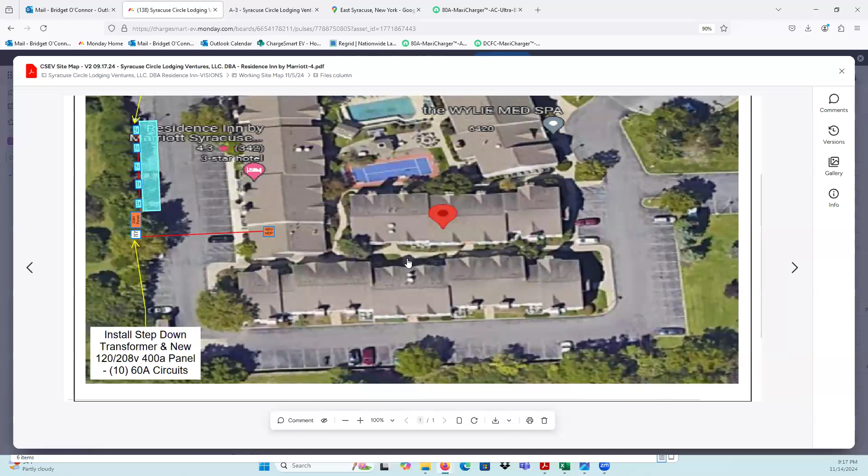Okay. And we're gonna need a full parking count for the site, what's existing and what's required for code. Yep. Okay. So number of rooms is 102, number of parking spaces here is 106, and we're talking about losing 1. We don't really say that the EV chargers cause you to lose a space. But for hotels, you're required to have 1 space for each guest bedroom, so if there's 102, we have a surplus then here of 4 spaces. So I think there's opportunity for you to reconfigure those.

Great. Again, I know it's a late night. I do wanna move on to the next one. Sure thing. Yep.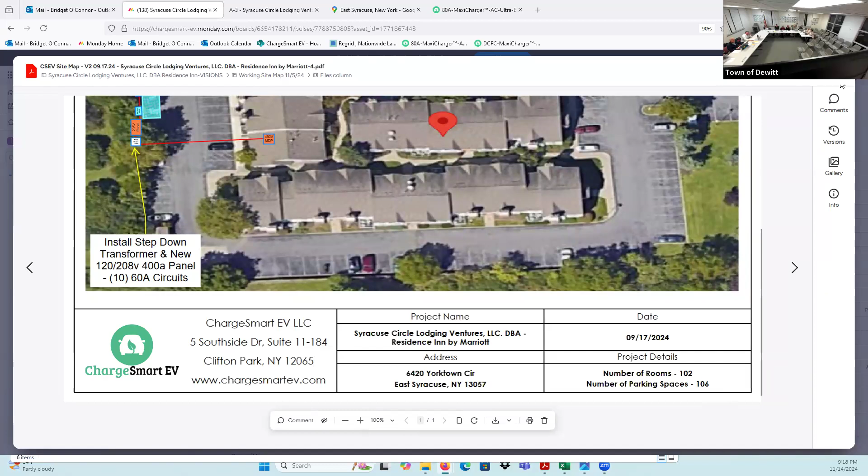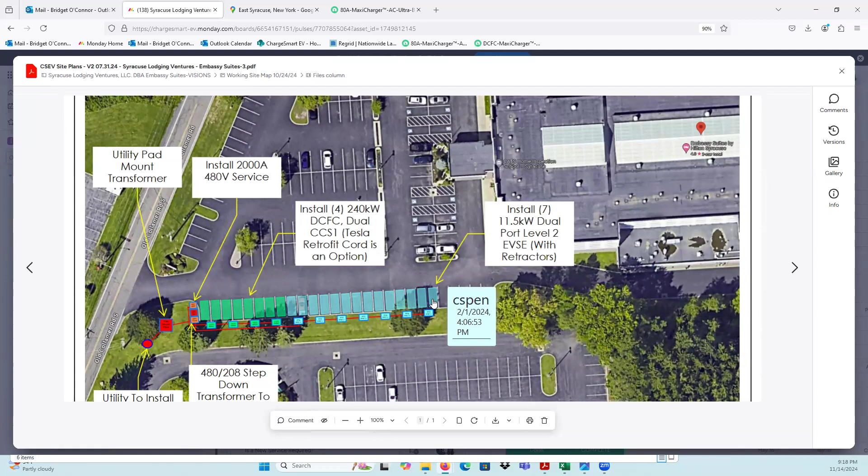Okay. So the last one is Embassy Suites, which is a mixed level 2 and level 3 project. So this has DCFCs, which are fast chargers. And I just want to pull up the layout for that. So this is again at the Embassy Suites, and we're looking at taking over this first row of parking spaces when you pull into the hotel. We are proposing 4 level 3s, so 4 DCFCs. A DCFC is a fast charger that can fully charge a car in like 30 to 40 minutes, as opposed to the level 2s, which take many hours. And then 7 level 2s here.

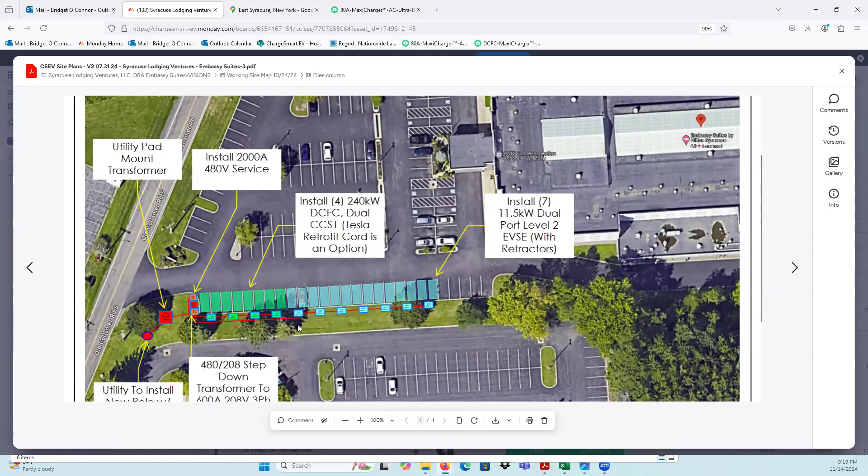We did already speak about the landscape screening, so we would do something similar here with either a hedge or some way to block these from the neighboring property. For this particular project, we need a larger power source. So we'd be working with the utility company, who would be installing a new pole on the corner that would go to a small pad mount transformer. And then our rack would be here. And obviously we would screen all of these. Level 3s often have their own dedicated transformer, they're remote.

Are these built into the charging? The level 3s will be powered by this new transformer that we're installing. And then the level 2s, it's all coming off the same power source, but we have a step down transformer that we would include. So is that one transformer gonna power all four of the level 3s? The one transformer will power all of the stations. We have to include a step down transformer because we can't just have the level 2s powered by the new transformer. It's too much power. So the conduit runs through a step down transformer that's next to our gear. I'll send in pictures of that. There's always these extra boxes. Yes, there's always stuff.

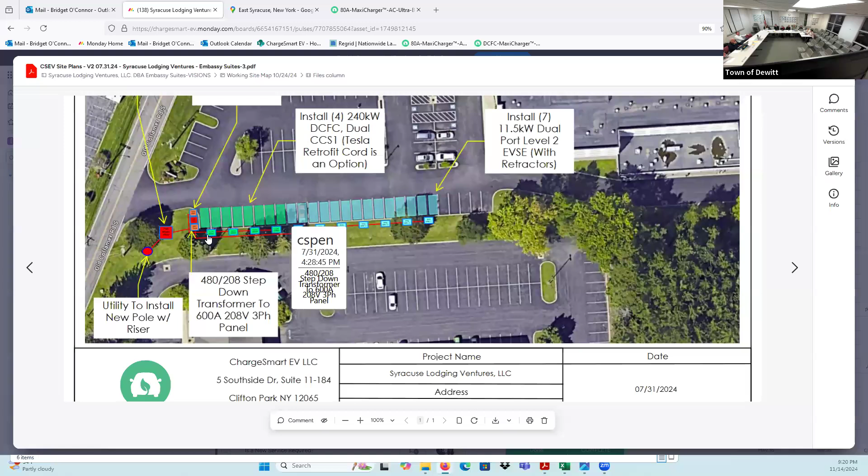And I wanna know where the property line is in this one. Yeah, I have that right here. And we still do need surveys. We did get surveys, so I sent them over for the other two properties as well. We haven't gotten them yet. Did you email them? Yeah, I did, because I didn't get them until just a few days ago. I didn't get them, Bridget. Okay, sorry about that. I'll resend. Thank you. We had this Embassy Suites in the original submission, but I didn't have the Courtyard or Residence Inn, but I did get real surveys. Hopefully that's part of the package you're looking at, but for the property line, we know we do have ample space here to put them in.

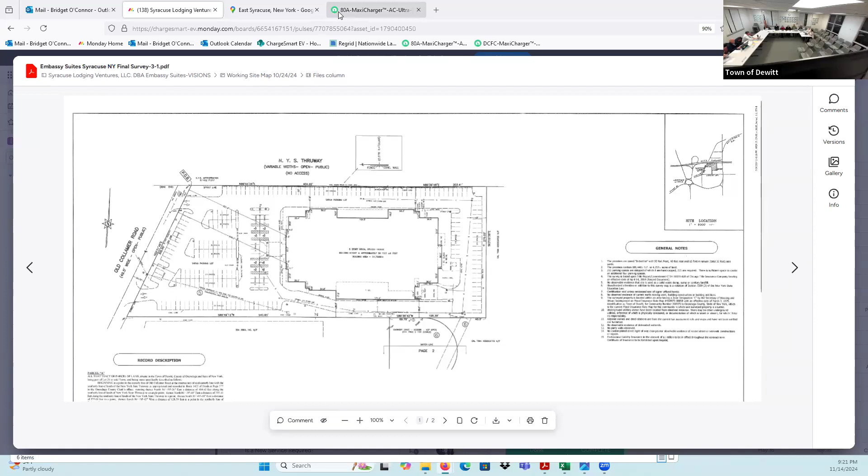Are the level threes on a charging network for the general public? Because this is a great spot for folks off the thruway to come and charge. So all of the charging stations can be utilized by the general public. The DCFCs would be a good option for people driving EVs who are coming by. Obviously, a fast charger is going to be more advantageous for somebody who just needs a quick charge than going and plugging into a level 2 that takes 4 to 6 hours to charge your car.

Those would primarily be used by the hotel guests. But yes, the DCFCs, in order to get the NYSERDA funding or the incentive funding for these projects, the DCFCs should be open to the public. The level 2s can be private to the hotel.

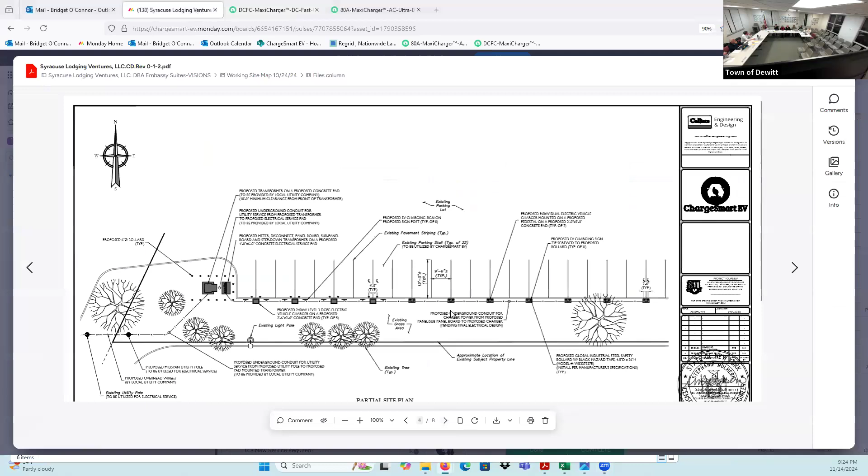Okay, so in addition to the landscape screening here, do you foresee any other modifications that you'd like us to make to the plan? The last thing, sorry, I'm gonna pull it up one more time. You back into those spots and those level threes are gonna be popular. So it's generally desirable not to put them so close to such a main thoroughfare onto the site. It's a little bottleneck. I don't know what other options there are here because of the power, but I think we should try and avoid that kind of cluster right there at the entrance. Does that make sense? This is just from experience.

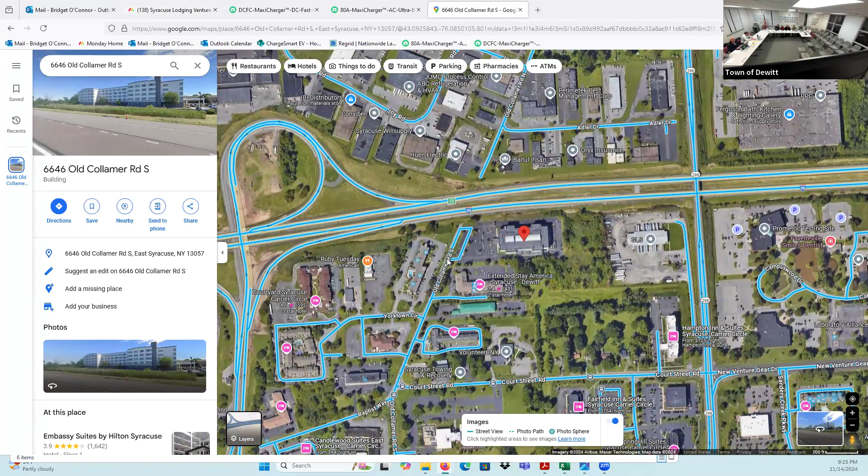So you don't want it near the entrance of the hotel because of? Yeah. You got folks coming into the hotel and you got chargers, they have to back in, so just the process of in and out, such a popular charging station, it's a confluence of traffic. Right, that's the parking spot, nobody really parks there. So do you have an alternate location that you would propose? I'm gonna go to the overhead so we can kind of just look at the whole scope here.

I mean, we've put them there because we have access to power here, right? You want to be closest to the road because we're coming off poles that are already on this road. So the utility company really picks where the power can go, and then we have to be within a certain distance of that transformer.

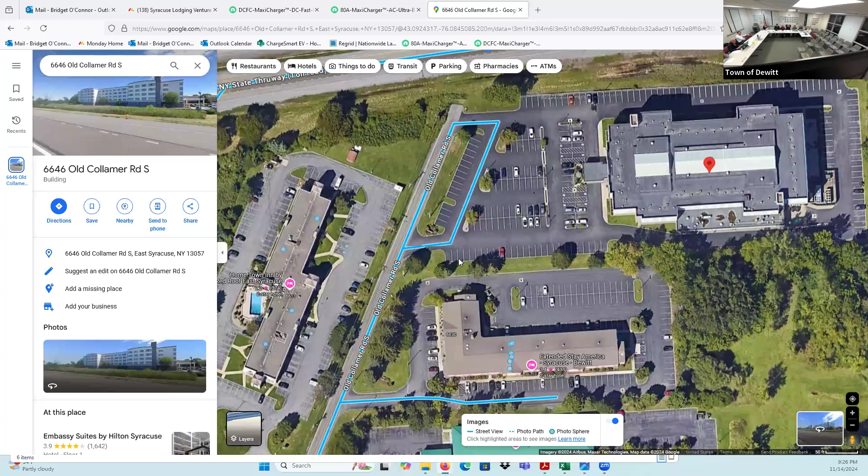You would swap the level threes and the level twos. The level threes are further into the site rather than at the corner. Yeah, can you move the level threes to the end or swap them? Or is that not close enough? You're saying you'd want level threes closer to the building itself? Yeah, well, away from the road. Just mirror the layout that you have. Yeah, away from the entrance. I get what you're saying. Oh, I thought the fast chargers were here and the slow chargers.

Yeah, I mean, we can explore that. To me, that makes maybe less sense because the people who are going to be parked there are not going to be hotel patrons. They would be people utilizing it from the highway. It seems like maybe we would want them further from the hotel, but obviously I would defer to you guys. The other issue is power: the further you go from your power source, the weaker it would get. So we have it structured that the DCFCs are the closest to the transformer because they need more power.

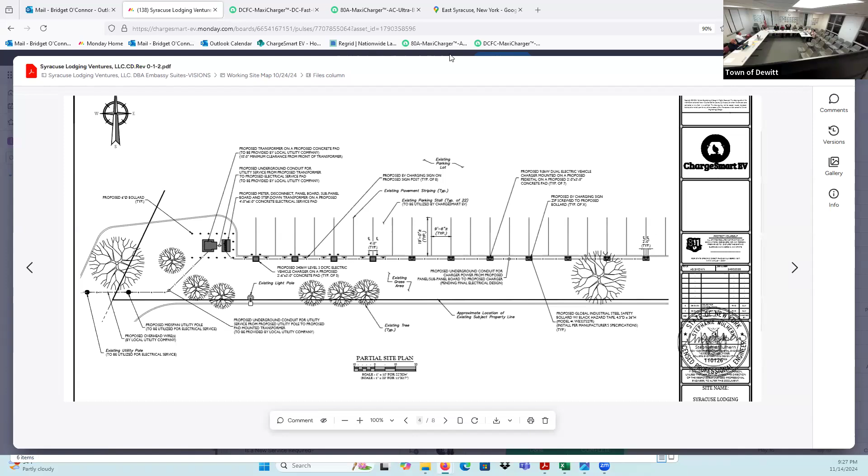How about level twos, level threes, level twos? There was a compromise. You guess which one it is. Sorry, it's late, we're losing. Guys, I'm totally with you.

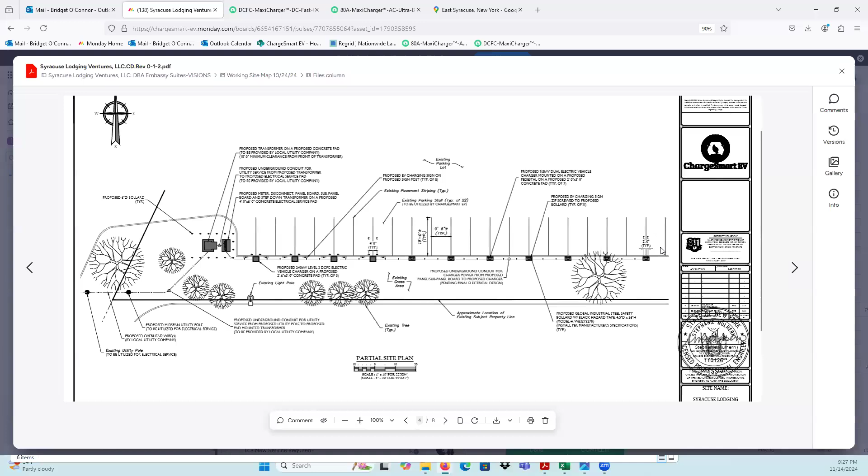Yeah. Maybe we could continue this conversation, but I do think that as the power source is going to be here for the level threes, it makes sense to have them as close as possible to that. The other thing I wanted to bring up really quickly is that we didn't have an ADA spot added at all. During the pre-planning meeting, we had discussed maybe putting a spot down here at the bottom and putting an aisle in here, so there was an option for an ADA spot if somebody wanted to park at the end and have closer access to the hotel.